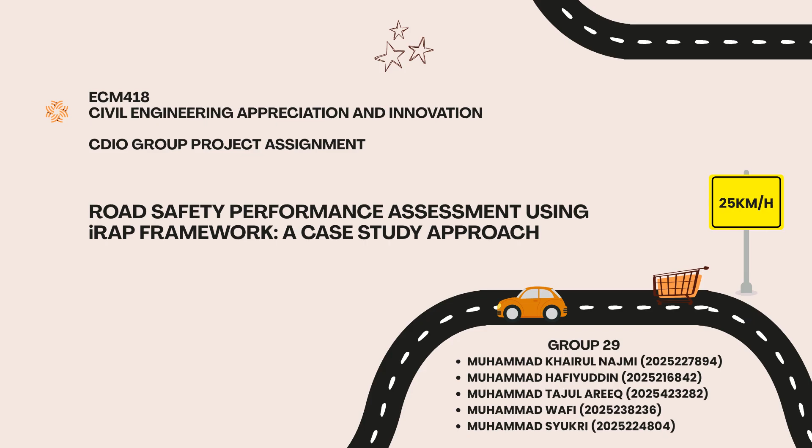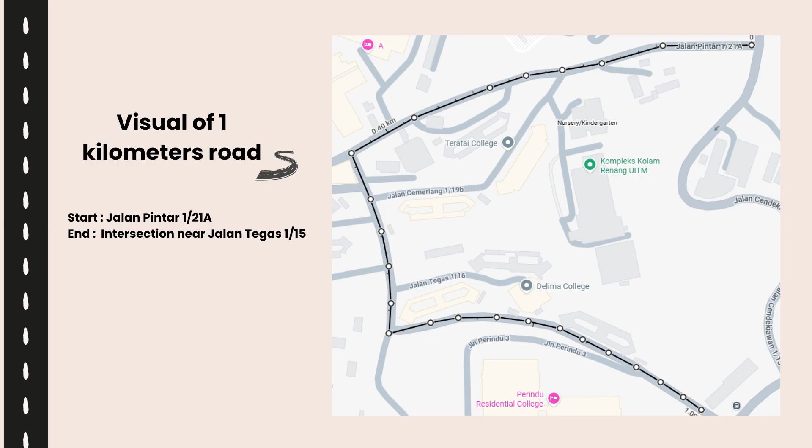Today, we are presenting our safety performance assessment of a 1 kilometer road section within our campus, stretching from Jalan Pintar 1/21A to the intersection near Jalan Tegas 1/15. This road is a primary campus artery, experiencing heavy traffic from staff and students, especially during peak lecture hours.

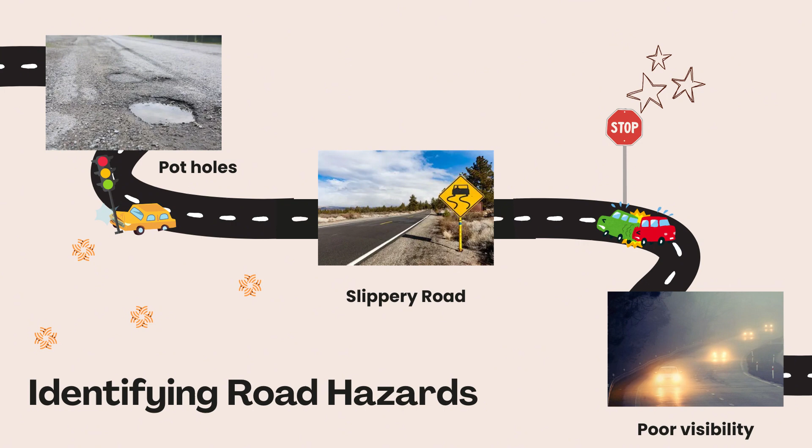Our objective was to evaluate the safety conditions using the International Road Assessment Program, which is the iRAP framework, in collaboration with the Public Works Department, JKR. By identifying hazards and performing engineering analysis, we aim to propose sustainable improvements that align with SDG 9 for resilient infrastructure and SDG 11 for safe, accessible communities.

Next, how do we ensure our roads are built for safety? It's all about the process. It starts on the ground with field observation, identifying real-world hazards through active on-site inspection. Next, we translate the data into action by coding hazards using the global iRAP standard for objective safety ratings. We then provide actionable recommendations for improvement, concluding the comprehensive report to drive change. Practical steps for a safer journey.

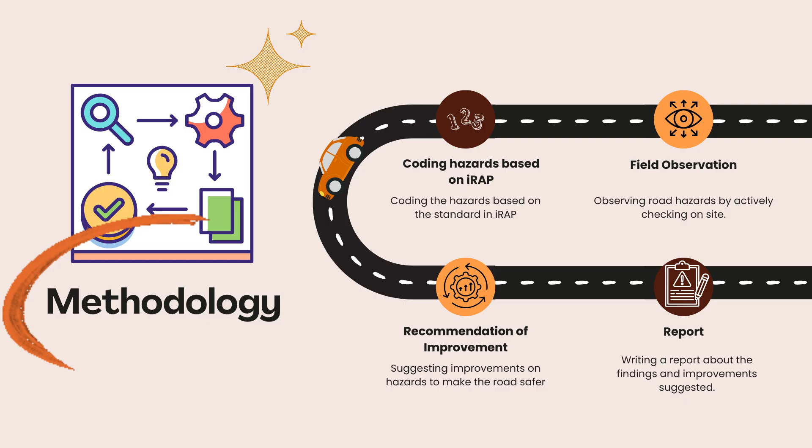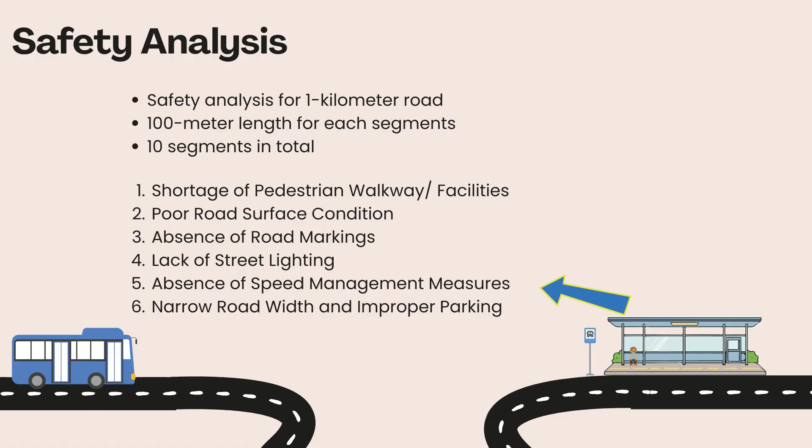That's our methodology. To observe the safety analysis, we divided the 1 kilometer road into 10 segments of 100 meters each. In each segment, we recorded road features such as lane configurations, roadside hazards, lighting, and traffic control devices. Our field observation revealed several recurring issues.

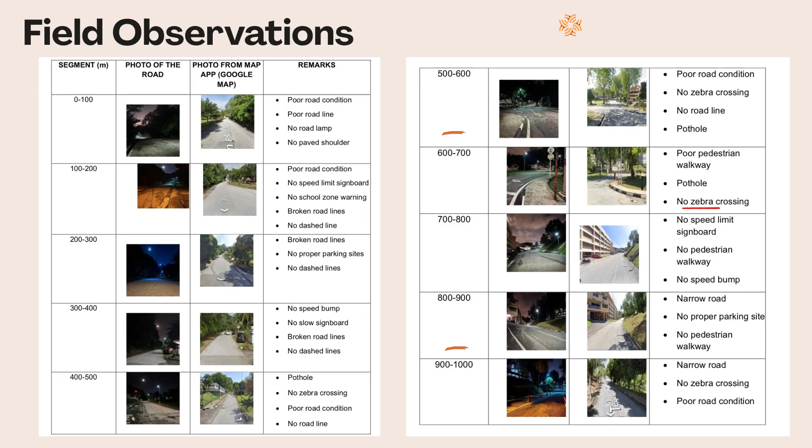First, segment from 0 meter to 100 meter. This segment suffered from poor road lines and a complete lack of road lighting. Next, segment 100 meter until 500 meter. This segment shows significant pavement distress, including potholes and broken or missing dash lines on the road. And lastly, from segments 600 meter to 1000 meters. These segments were characterized by narrow road width, a lack of zebra crossings, and insufficient pedestrian walkways.

Using the iRAP framework, we categorize these hazards into specific attributes. First is the shortage of pedestrian facilities, particularly in segments 600 meters to 900 meters. Without continuous footpaths, students are forced to walk on the carriageway, exposing them to direct traffic. iRAP research confirms that roads without facilities in high activity areas face significantly higher risks of fatal crashes.

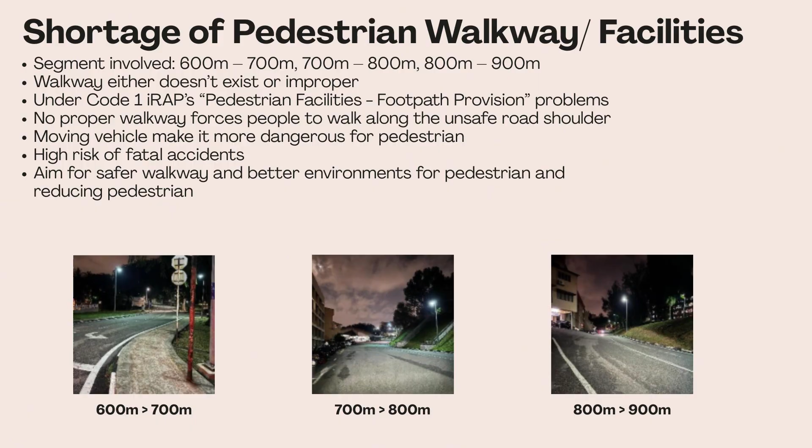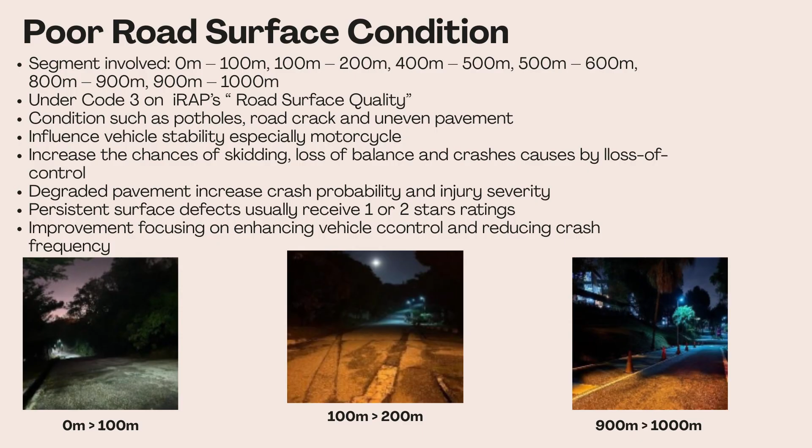Next is road surface condition. We found potholes and uneven pavement in segments such as 0 meter to 200 meters and 800 meters to 1000 meters. This is critical for motorcyclists, as degraded surfaces increase the likelihood of skidding and loss of control crashes, typically resulting in a low 1 to 2 star safety rating.

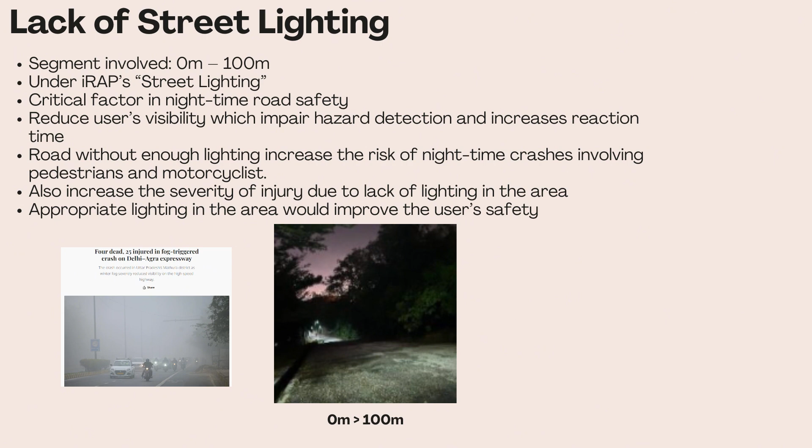Visibility is another major concern. In segment 0 meter to 100 meter, there is a total absence of street lighting. Poor lighting reduces hazard detection time and significantly increases nighttime crash rates for pedestrians and motorcyclists. Additionally, the absence of road markings in segment 0 to 100 meter and 400 to 600 meter means drivers lack visual guidance for lane boundaries. This increases the risk of head-on or sideswipe collisions, especially during rain.

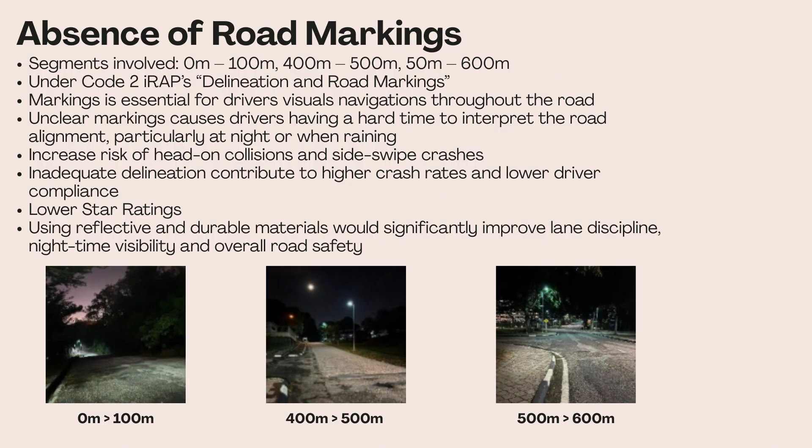Finally, we noted a lack of speed management in segment 100 to 200 meter and 700 to 800 meter. Without speed limit signs or physical calming measures like bumps, drivers are more likely to exceed safe speeds, raising the severity of any potential impact.

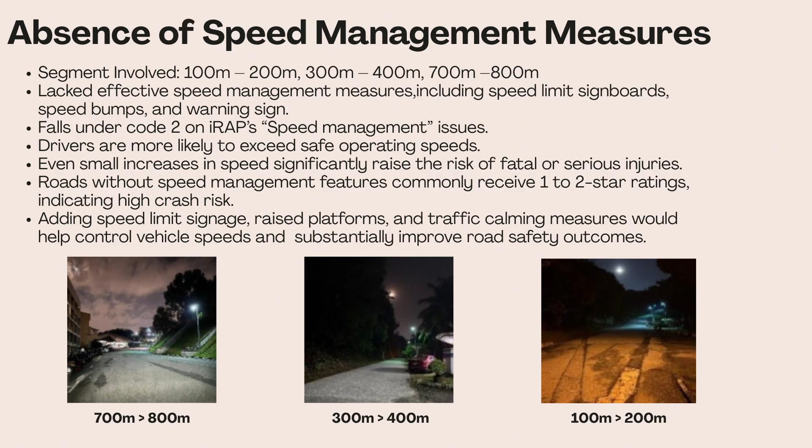Then, we are currently evaluating a critical safety concern regarding narrow road width and improper parking along specific segments of our infrastructure. The primary areas of concern are the segments from 800 meters to 900 meters and 900 meters to 1000 meters. Under the iRAP methodology, these conditions are classified as Code 1 for both lane width and roadside activity attributes. Assessments show these factors typically result in much lower star ratings for road safety.

The current layout increases the likelihood of sideswipe collisions and run-off road crashes. Narrow lanes and roadside activity constrain effective road width, obstruct sight distance, and lead to unpredictable vehicle movement. To enhance overall safety, we must provide adequate parking facilities and improve lane width where feasible to reduce these conflicts.

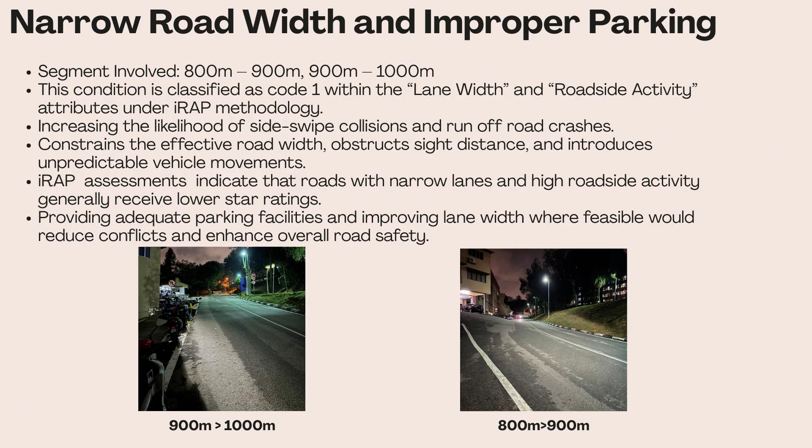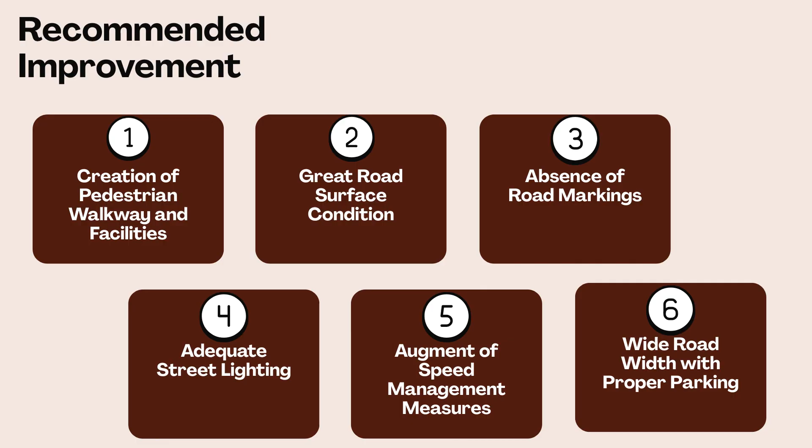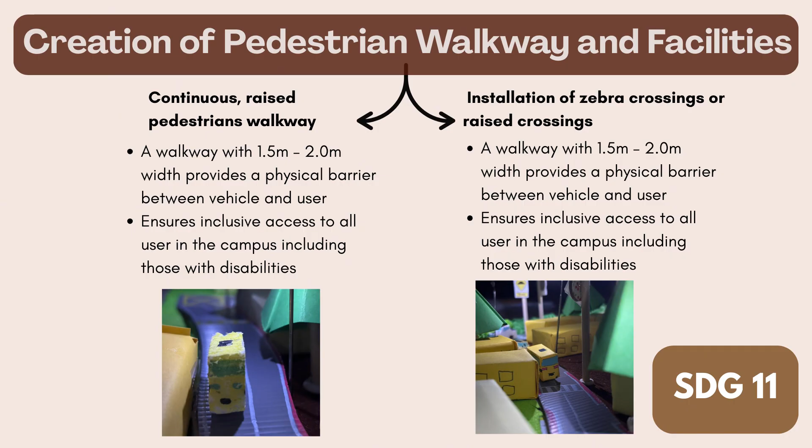Based on our analysis and Jabatan Kerja Raya JKR standards, we propose the following targeted engineering solutions. First, pedestrian safety. Install continuous 1.5 to 2 meter wide raised walkways in the 600 to 900 meter strip to provide a physical barrier from vehicles. Second, pavement rehabilitation. Perform comprehensive resurfacing in segments with potholes to restore skid resistance and stability.

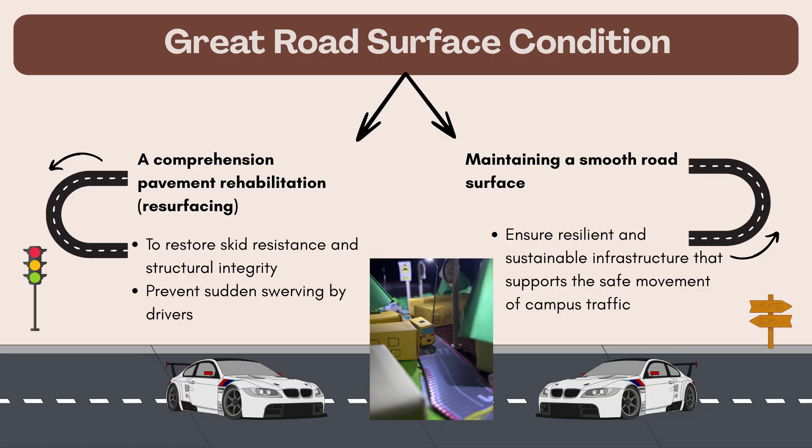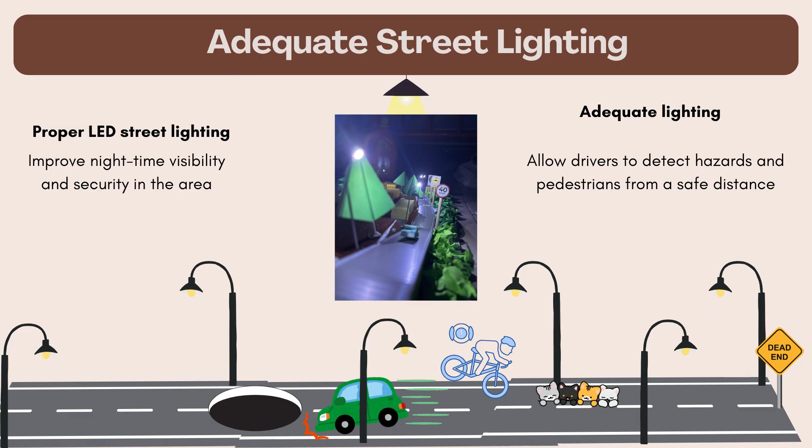Third, delineation. Apply high visibility thermoplastic markings for center lines and edge lines to improve lane discipline. Fourth, lighting. Install modern LED street lighting in the initial segments to enhance nighttime security.

In addition, safety and efficiency start with how we design our streets. But as our community grows, our current roads often struggle to keep up. To address this, we are prioritizing road widening wherever feasible. By meeting standard lane width, we ensure smoother traffic flow for everyone. It's not just about more space, it's about smarter space.

This includes the implementation of clearly designated parking zones, so the main thoroughfare stays clear. Crucially, we are establishing strict no parking zones in high-risk areas to protect vital infrastructure and ensure visibility where it matters most. Widening roads and proper parking, building a safer and more accessible neighborhood for us all.

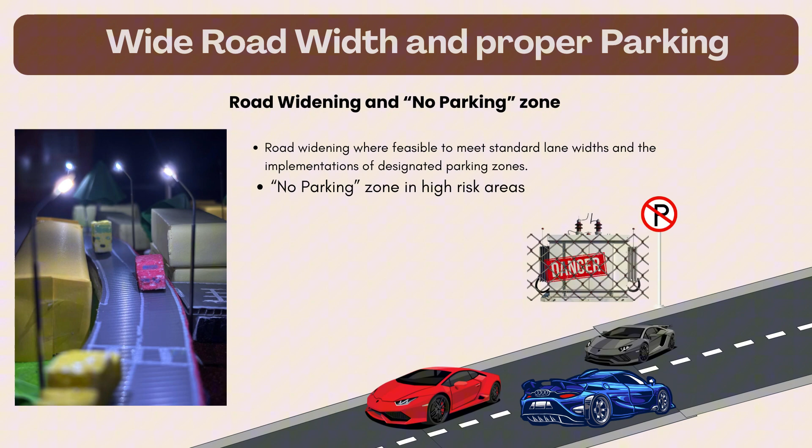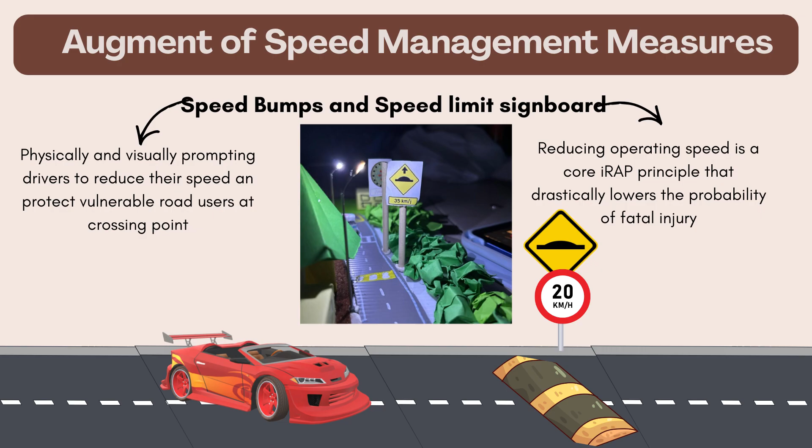Let's move forward together. And lastly, speed control. Implement speed bumps and clear signage to enforce the safe system approach within campus.

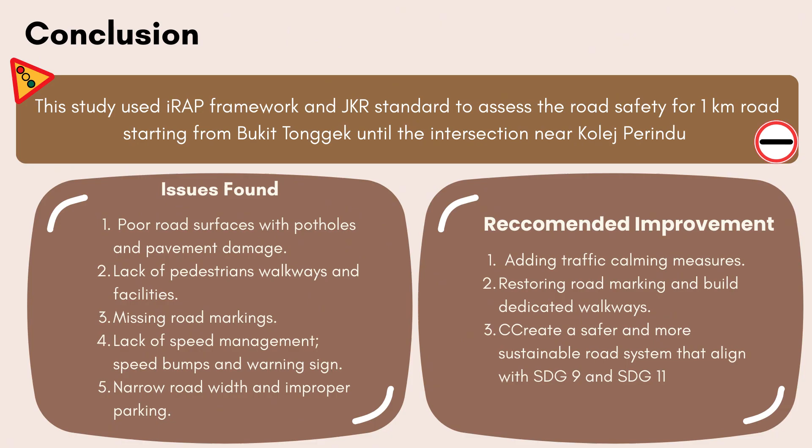All in all, in conclusion, our study identified that several sections of this 1 kilometer road do not comply with JKR standards regarding surface quality, lighting, and pedestrian safety. By implementing these proposed improvements, we can create a safer, more sustainable road system that protects all campus users. This project has provided us with essential hands-on experience in solving real-world infrastructure problems using the CDIO approach, reinforcing our responsibility as future engineers to prioritize public safety.

Overall, this group project study gave civil engineering students valuable hands-on experience in addressing real-world problems using the CDIO approach. It also reinforced the idea that engineers have a professional responsibility to prioritize public safety through proactive infrastructure management.